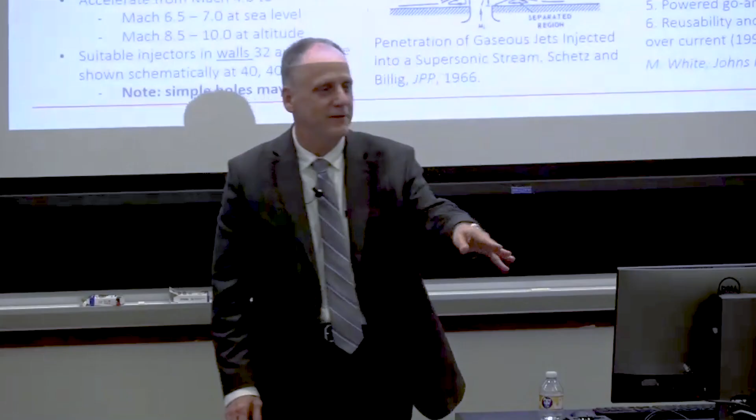But my memory of Fred Billig is from the aerospace sciences meetings that we used to hold in Reno, Nevada all the time. You would see Fred with his yellow notebook, writing notes with his stack of papers, running from one room to the next room, to the next room. He was a lifelong learner, and that was just a great example for all of us.

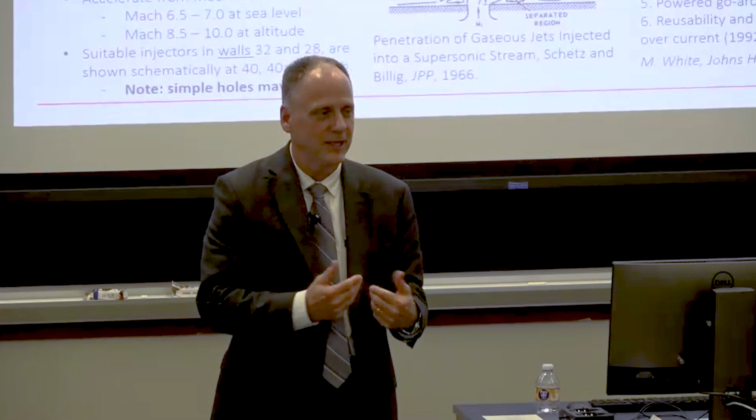But for y'all, the students in here, I don't want to set the bar too high, but Fred had a patent on a supersonic ramjet missile that resulted from his PhD dissertation. So that's no pressure to think about that.

And he worked on lots of things, including jets into a crossflow, which are fuel injector concepts to fuel these machines, because the flow path in here is also supersonic. So it creates a very complex shock-boundary interaction, shock-shock interaction, fuel-air mixing problem. All the gas dynamics that you really could possibly be interested in are happening in this particular problem. So it's a very interesting problem, and I'll show a few results on that.

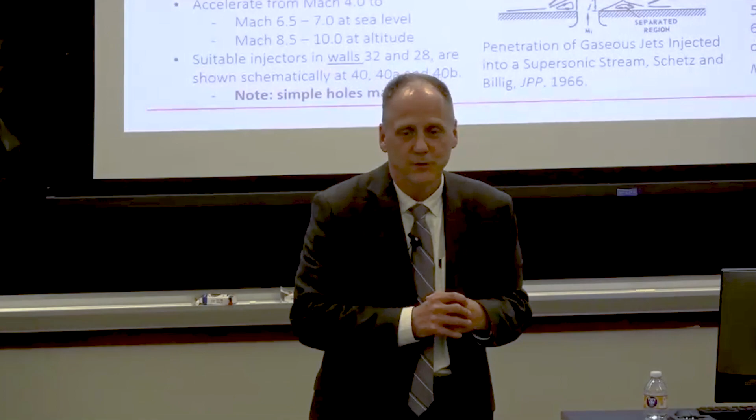And then he also was very instrumental in a program called the X-30, or the National Aerospace Plane Program, which is really what brought me into this field back in the late 80s. This was the Ronald Reagan Orient Express, supposed to be a single stage to orbit, hypersonic, scramjet-powered airplane. So his dissertation work that he started as a student became a major program.

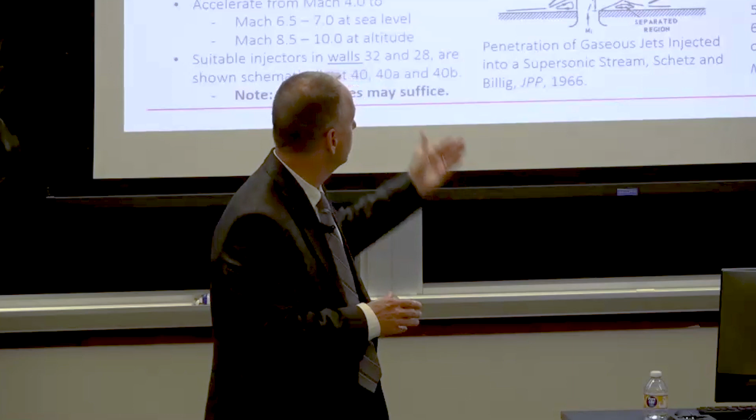There's a lot of people around the country that have PhDs - I'm looking at one right now - that were funded by this program. This was a major program in the country, and Fred Billig is at the top of this. Without Fred Billig, we're not doing these things. And so his impact is amazing. I was lucky I got to know him a little bit.

When I was asked to give the talk, I thought, what am I going to talk about? There are fluid mechanicians at Johns Hopkins who are world renowned, so I'm not going to try to wow them with our ability to do fluid mechanics. So I stepped back and decided to present on topics that I thought Fred might enjoy, or at least find relevant.

I'm going to focus on hypersonic turbulent flows. Sorry, this is my prop, keeping me on track.

I'll provide a little bit of optimism towards building reduced order models for these types of flow fields. There's been a lot of skepticism over the years, but I think we have tools today that will allow us to make progress that we couldn't make 20 years ago. Hopefully this will inspire a few collaborations with faculty and students here.

I have to acknowledge the sponsors for this work: AFOSR, ONR, this is a collage from these folks. But most importantly, I want to acknowledge the collaborators and students. Everything you see has a student's fingerprint on it, including our laboratory, which I'll talk about later. They're all brilliant, and they're just instrumental in our success.

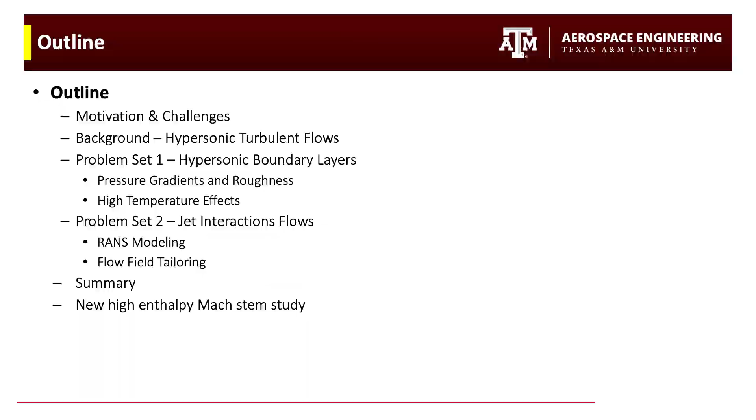The outline for the talk is motivation and challenges, but I won't spend a lot of time on background because I want to get to some of the cool results. I went a little heavy on results, so I designed the presentation so that if I'm running out of time, I can skip sections. If you see me skip through a few sections, that's just because I'm running out of time, but I designed it that way.

I want to talk about two different problem sets. Problem set one is hypersonic turbulent boundary layers, which is more of an external aerodynamics type problem. Problem set two will be supersonic jet interaction flows. The common theme between the two is they're both turbulent, they both require either large scale simulations or models, and they also require experimental data to validate. Then we'll summarize and talk about some ongoing work.

Just a little bit of motivation: hypersonics is not new, it's been around for a while. I like this picture because I work at Texas A&M. The guy on the bottom left, if you know anything about Texas A&M, you'd recognize those boots. That's Frank Molina, and these are Aggie boots. He was an Aggie, graduated from the mechanical engineering department, went to Caltech, became Von Karman's right-hand man, and flew the first hypersonic flight.

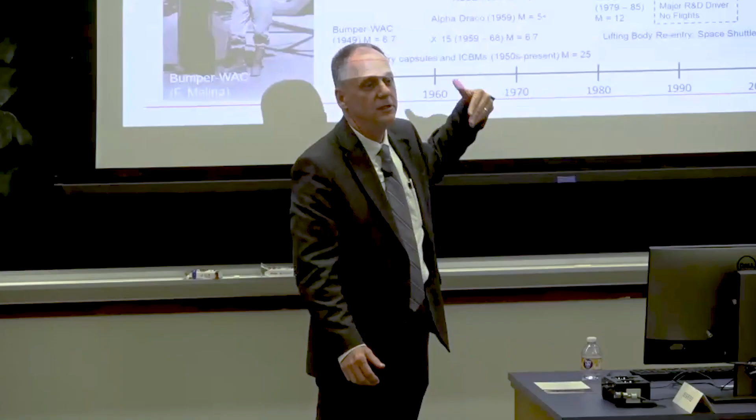There's been a lot of really fantastic work over the years to develop hypersonic flight systems, from reentry capsules to the space shuttle to all these different flight test programs. I used to have a picture of the X Prime that looks like the dream chaser shape, a beautiful vehicle. So all the things we're doing now in hypersonics, someone has probably done before. It's pretty exciting. So what makes hypersonics hard?

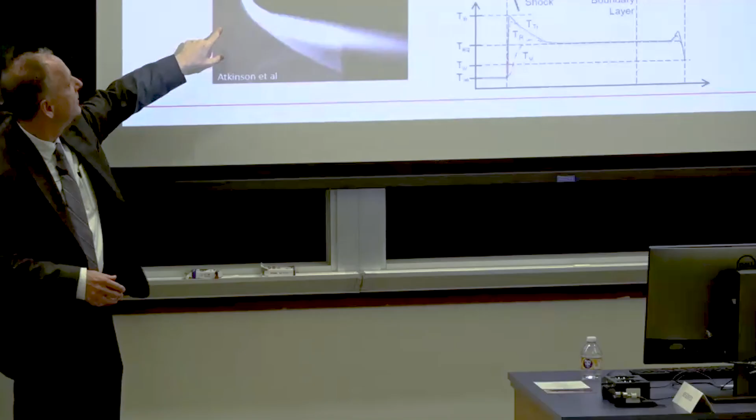Maybe what makes hypersonics hard, which also it's the same thing. This blue text on the right really does sort of summarize it. But let me tell you what this is. This, and Dave has seen this facility in action. We have a wind tunnel, which I'll show you in a few minutes. We call HXT, the hypervelocity expansion tunnel.

And we can generate true flight conditions up to about Mach 15. We're going to push that to Mach 20, 25. This is a Mach 15 shot. And you can see this is the natural emission downstream of the shockwave. And so this model is about 20 inches wide, about 24 inches. It's a big model. It's in a big wind tunnel. And this is just a video showing this, a lot of electrons in there.

But this was taken as part of an Aeronautics project that we're doing for Lockheed Martin. But that's just really cool, right? And if you look at the entire model, that plasma goes off the back. You can see the plasma going off the back of the model. So the turbulent boundary layer that we're studying also has these physics dumped on top of it. So this is a really complicated problem.

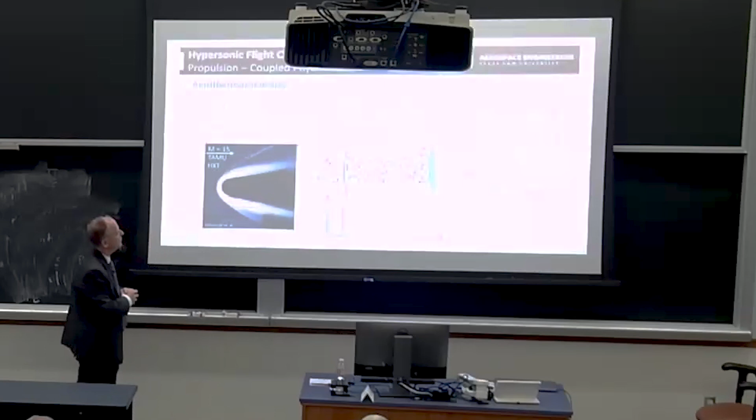And I tried to articulate it a little bit here, but when we jump across this shock, for that particular case, it's about 11,000 Kelvin right there. And then it starts to rotationally excite very quickly and vibrationally excite very slowly. Chemical equilibrium, all this stuff happens, and we're about 6,000 Kelvin. Then you're moving into the boundary layer.

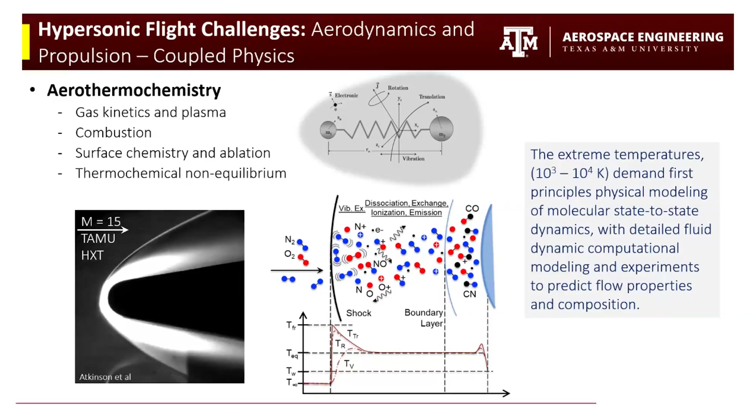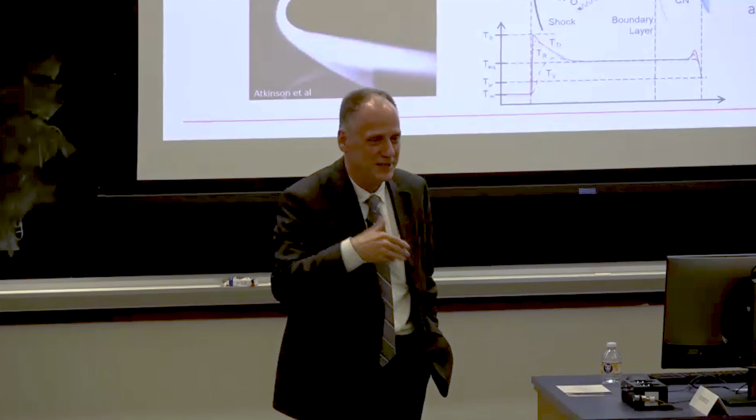So a quote from Fred Billig, when he was at Wright-Patterson, the Air Force was thinking about a certain Mach number regime, and I won't quote the numbers, but he asked me if I knew the difference between this Mach number and that Mach number. It was about 2. So I said it was about 2. He says, no. Every metal on the planet melts at this higher Mach number. So that was a direct quote. That was sort of who Fred Billig was as a person when it comes to these things. So there's a lot of interesting physics going on in these problems, and we're excited about all of them.

Now I'll talk a little bit about viscous flows, because we're going to couple that chemistry with viscous flows. So transition and turbulence are the two big problems when it comes to high-speed viscous flows, and hypersonic vehicles are dominated by viscous effects. So what I'm showing here is a transition mode that only really exists for hypersonic speeds, which is second mode transition, and you can sort of vaguely see it. See this rope-like structure? That's a trapped acoustic wave in the boundary layer that will amplify and ultimately break down and lead to turbulence. I think I saw some simulations of this today.

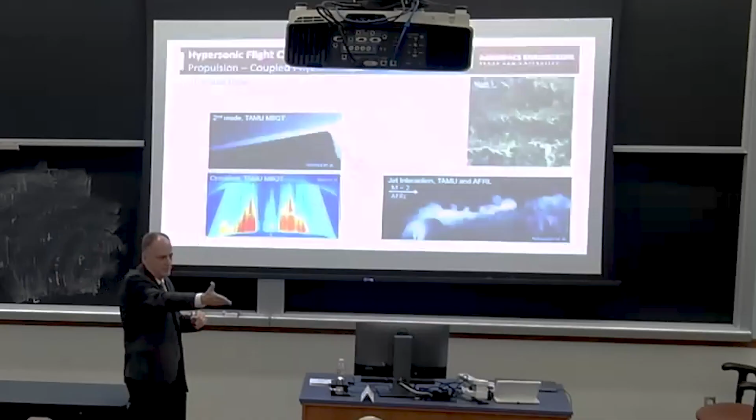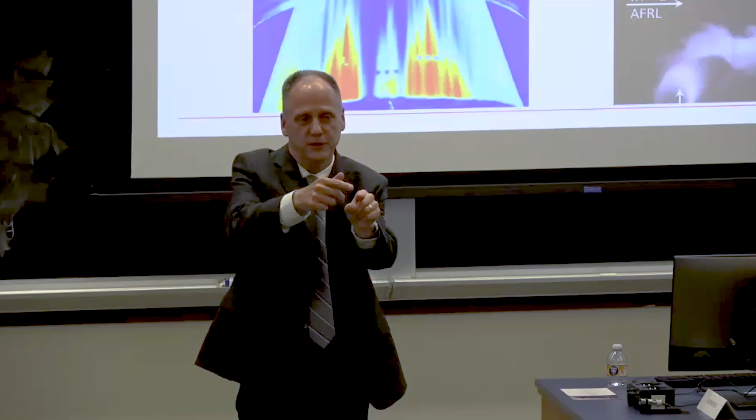And this is what it looks like in the wind tunnel. This is a Mach 6 quiet tunnel that we operate at A&M. This one is a 2-to-1 elliptic cone. Okay, that was a HIFiRE flight test. And then this structure here is the characteristic structure for what's called cross flow breakdown. So what happens is you have the flow wrapping around the model. So in the boundary layer, you get an inflection point, and that creates these vortices that go down the boundary layer. And these themselves then generate shear layers, and those shear layers are what leads to transition. So this is a precursor to transition. This is actually starting to transition on this model.

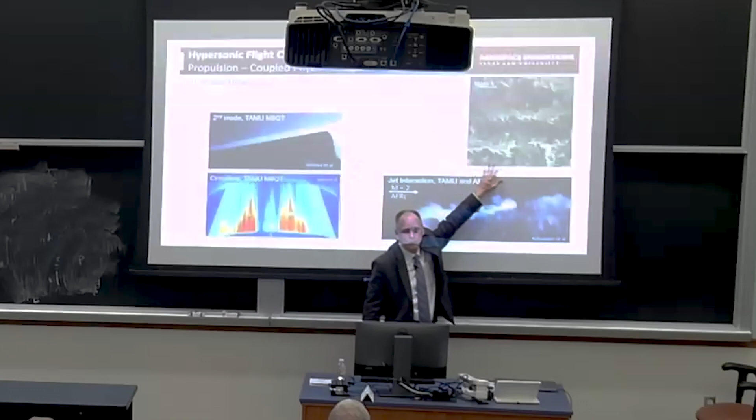But when it goes turbulent, this is a top-down view. I don't know how well that's on the screen. It's magnificent. Up there, not so great. You can see a turbulent boundary layer. If you zoom in, you can see all kinds of scales in here. So this is a high Reynolds number Mach 5 turbulent boundary layer. And so once it goes through this process and breaks down to turbulence, it kind of looks like this. And then to solve this problem requires, again, resolving all of those scales, which is a really hard problem.

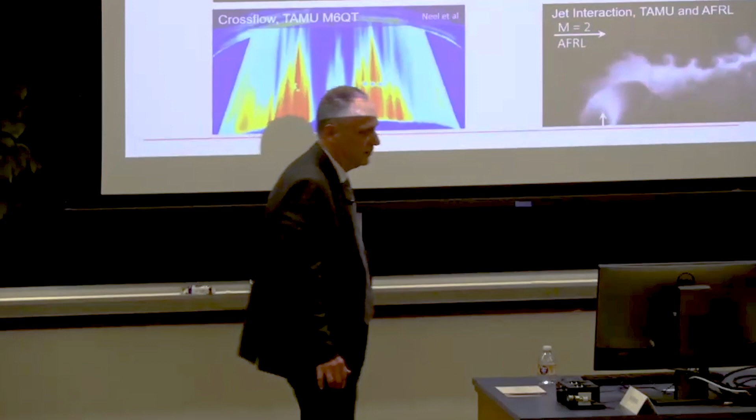And this is a jet interaction. This is for Fred. It shows the turbulent mixing in a supersonic cross flow. This is a fuel injector. This experiment was done in AFRL. We'll talk about different geometries a little bit later on that. So those are the couple of problems that we're really interested in. So I'm going to talk about turbulent boundary layers a little bit more. And really, I just want to brag about this figure.

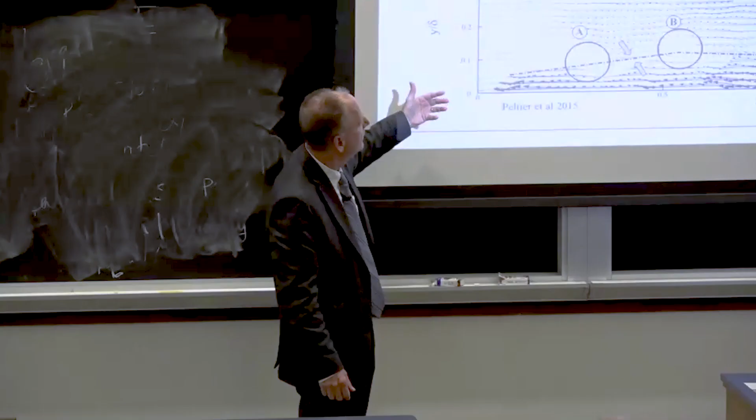So I saw some great PIV capabilities today. This is a PIV image at Mach 5. What this is is a convective velocity plot. So what we've done is subtracted off the convective velocity. And what you're seeing circled here are signatures of these hairpin vortices in there.

In this line here, you've got flow going that direction and flow going this direction. This is the stagnation line along what's called a very large scale structure. This is in a Mach 5 boundary layer. So this is, I think, the first measurement of its type in a hypersonic boundary layer. This was an incredible measurement.

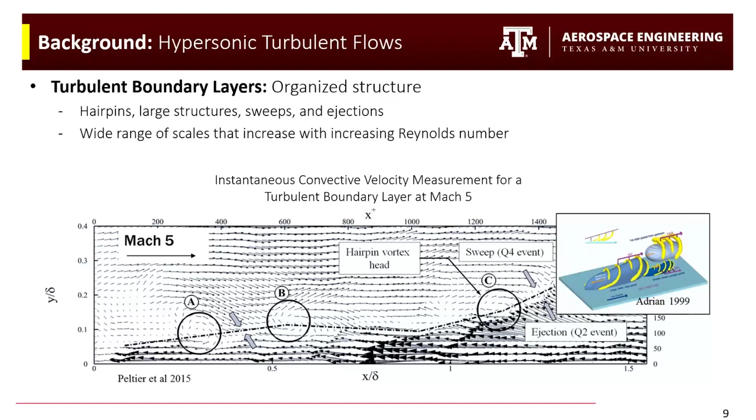It was done by Scott Peltier, a student. He did this a number of years ago. It's just a beautiful image. So I'm bragging about that. I'm sorry. It's relevant; you'll remember this figure because we're going to come back to it.

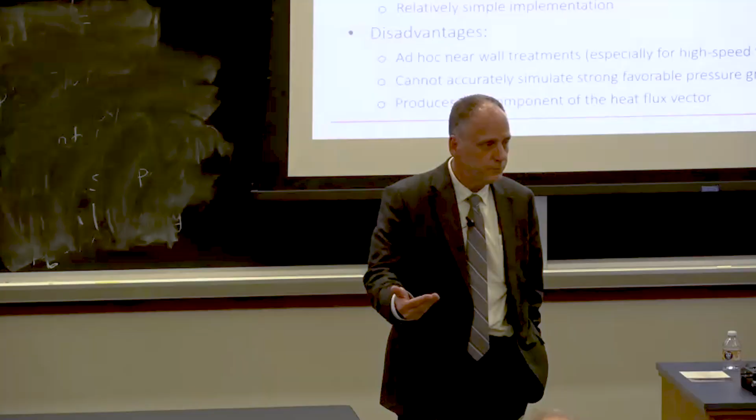Okay. So in terms of modeling of turbulence, resolving all of those scales is computationally very expensive, especially if you turn on chemistry. I'm going to show you the equation set and how the equation set changes in a few minutes, but when you turn on chemistry, the ability to do direct numerical simulations gets really fun, because your equation set gets really big.

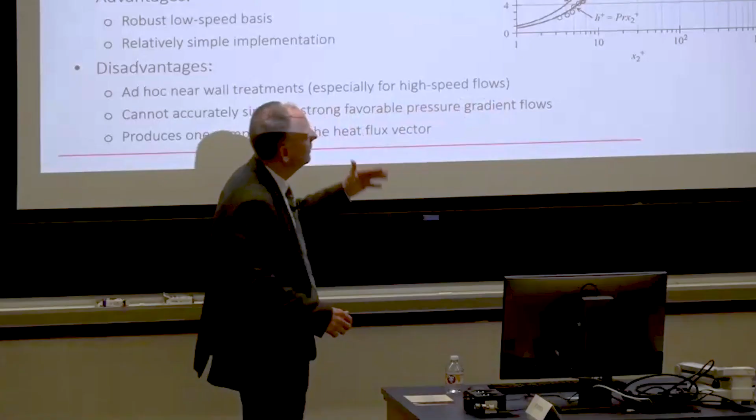And what we're going to find is that may change for hypersonic flows in a way that we don't predict. So the advantages of these models, they're relatively robust at low speed, really simple to implement. Disadvantage, this near wall behavior is treated. I should point out, for those that aren't in our field, this is like the bottom 1% of the boundary layer. This is really, really close to the wall. And that's a log scale. That's really, really close to the wall.

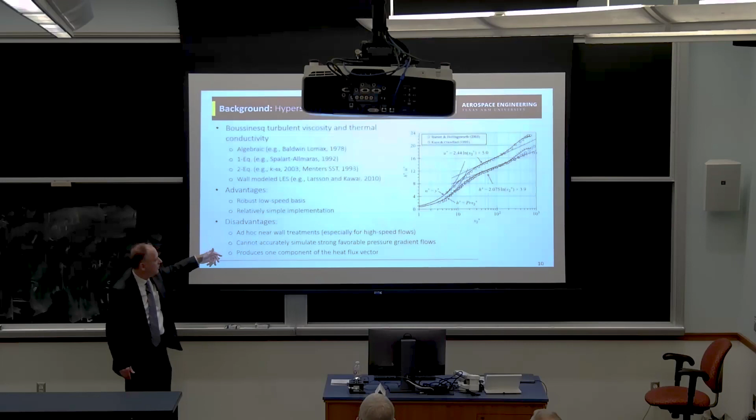So the near wall treatments are ad hoc, especially for high speed flows. And I'll show you that we can't simulate favorable pressure gradients with any of these models. And then for the heat flux behavior, the current treatment that we use really only gets one component of the vector correct. The other two components are more or less incorrect, and that's just accepted. So this is the state of the art. But there are significant errors.

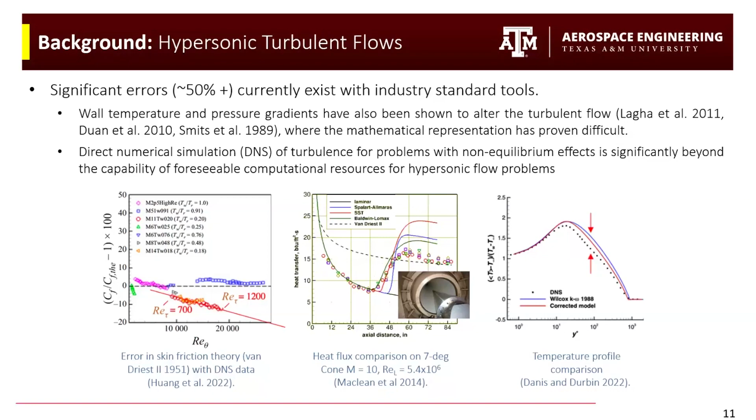If we start to look at very high Reynolds number cold wall problems, which is relevant to hypersonics, and extrapolate this out to a realistic Reynolds number, we're starting to see large errors in the skin friction. You can see large errors in the heat flux. We've got other data that we can't show, but there's very large errors, up to 50% errors in the heat flux for these types of problems. You can see that the temperature profiles are also missed by this. So bottom line with this slide is we've got work to do in order to improve our prediction capability for these types of problems.

All right, so that leads to the research objective.

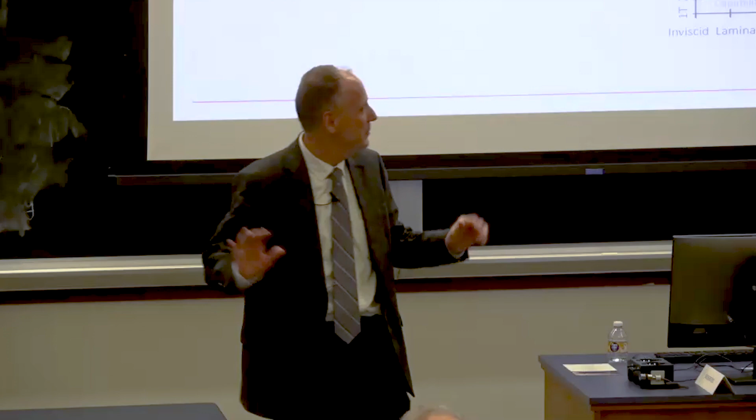Sorry, I pace when I talk, so hopefully that's okay. If it's not, if it's distracting, let me know. And we do love this stuff.

And so our objective really is to advance understanding and mathematical treatments for hypersonic turbulent flow. That's for this one. Tamir, if I would have called you, I would have put the transitional results in because that's what we talked about today. We're going to talk about turbulent flows.

Our approach is really founded in two steps. First goal is to develop new mathematical treatments because the mathematical treatments require new advancements. The second goal is to create databases with numerical and experimental data to validate our ideas or sort out what's wrong with our ideas and fix them. And this figure, I try to summarize it.

So this is fluid dynamic fidelity on the x-axis. So we have inviscid to DNS, and then you can think of this as sort of thermochemical fidelity on this axis. Okay, one temperature model, two temperature, and this will make sense in a few minutes, three temperature. At the top, we treat every internal state of each molecular species as a species, and we resolve it all. So ideally, we would be up in the right corner there for a model-free simulation. We sort of live on this dashed line right here today.

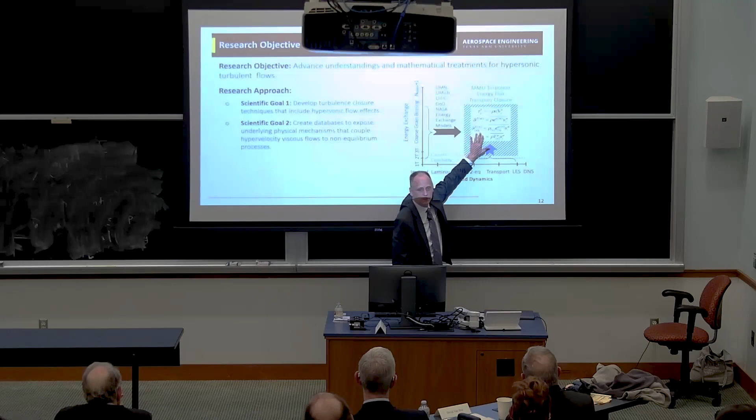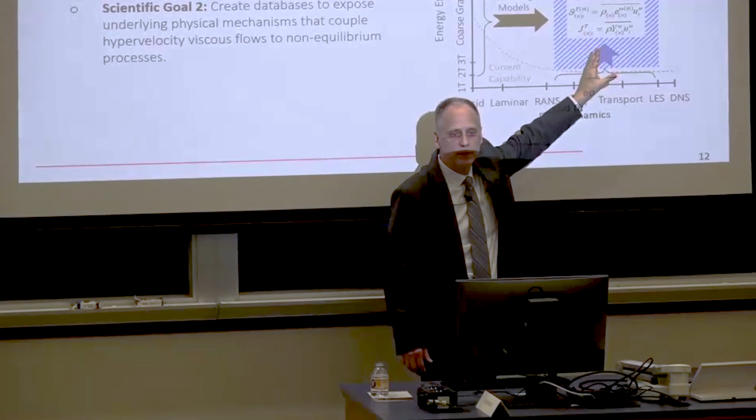And what we're trying to do is to develop models that push us up and into that direction. So that's the big picture of what it is we're trying to do. We work with a lot of people to try to accomplish this. And what's listed in here are the second order turbulence moments; I'll talk about these a little bit later. The experts in the room will recognize all of these, but if you're not an expert, I'll explain what that is in just a few minutes.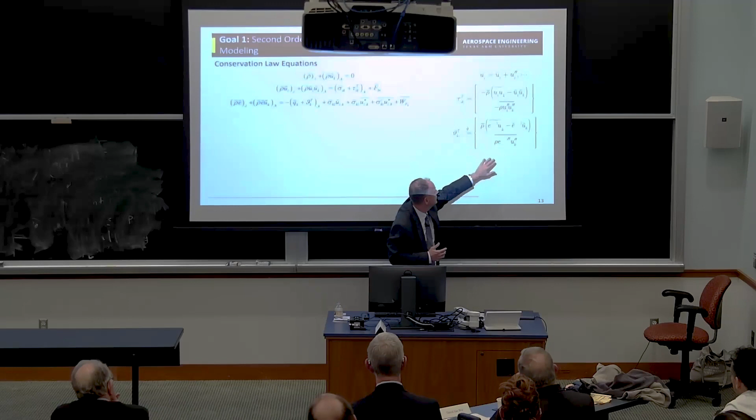The one above is what it looks like if you're doing large eddy simulation. This is what it looks like for Reynolds averaging. This is the energy flux. I work with energy, not enthalpy; there's some theoretical advantages there. But if you go to hypersonic flows, it looks a little different. That was for low speed flows. This is what the equation set looks like for hypersonic flows, so it's a bit more challenging.

So let me just walk through a little bit of this. We're going to introduce now a species conservation law equation, which has your chemical production terms, your molecular diffusion, your turbulent diffusion. Now you split the energy up into translational motion and electrons, which, because the speeds are so different, have a separate electron equation. You have internal modes, so you have an energy pool for each of the internal modes. If you're running a CFD solver today that's doing high temperature, non-equilibrium gas dynamics, you're solving an equation set that looks like this, probably a finite volume version.

And so we have all of these new unknowns to deal with here. What we like to do is derive equations for our new unknowns. So we take unknowns of the previous set of equations and we derive transport equations for all of those new unknowns. And if you're thinking, okay, problem is solved, I now have equations for all the new unknowns, Tamir's laughing because we can't solve these equations. We can only model them. Because every time we do this, we introduce new unknowns, because they're still nonlinear. So it never stops. So we have to model equations.

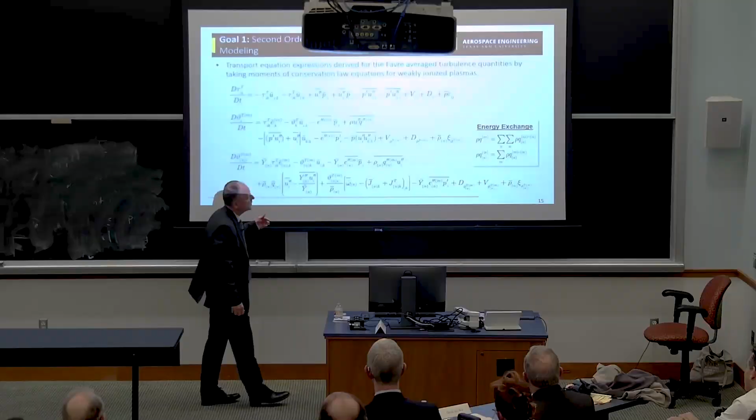So I tell people that's my lot in life: to take very complicated things and try to whittle them down to very simple things that we can put our heads around and make progress with. So that's what we're going to talk about as we go through this talk. But this is the equation set. What's really interesting, let me talk a little bit about this energy exchange here. So when we add up all of these energy equations, wrong equation set.

When we add up all of these energy equations, they have to add up to the overall energy equation. And so we have energy exchange terms, which are up on this slide. These energy exchange terms allow us to account for energy. If you have a collision and you excite vibration in this molecule and you lose vibration in this molecule, you have to account for that in your energy exchange. So those terms over there are how we account for that energy exchange.

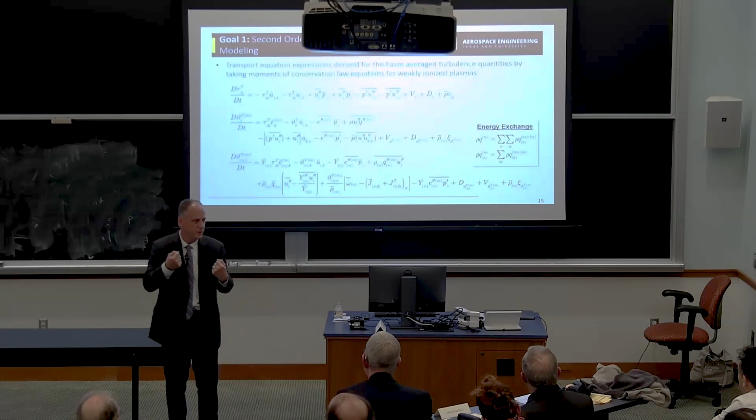So you have to do that species by species. We don't do it collision by collision. We're not that good, but we do it species by species for each. And so you have external, M is internal mode, N is species, M is in, you got it. So bottom line, it's complicated. So that's the mathematical foundation.

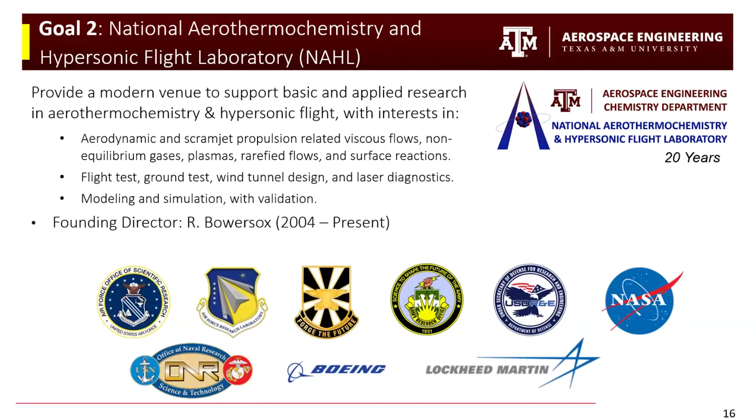So now I'm going to talk about the laboratory. We're going to go back to the mathematics in a minute, but I'm going to talk about the laboratory next. So with all of that in mind, we developed a laboratory 20 years ago. It's a pretty pretentious title, National Aerothermochemistry and Hypersonic Flight Laboratory. My program officer insisted on the name National at the time, and he was paying the bills. We put National in the title. It's really that simple.

And it stuck. And what you're going to see as we go through this, I don't have a whole lot of slides on this, but everything we've built in the laboratory, the thing I'm most proud about, they literally gave us, and David's been there, a metal building in a ditch by the airport. They didn't even have air conditioning when we first moved in. So we turned it into a laboratory. Everything you see the students built, wind tunnels, laser diagnostics, we put them all in. So the student fingerprints are on every bit of this. And really, it's one of the things that make me proud about this laboratory.

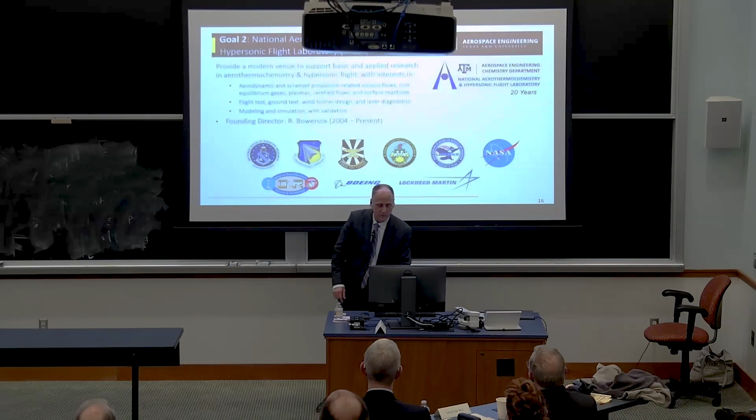But we really wanted to create a state-of-the-art venue to support basic and applied research in hypersonics. One of the corrections on my computer, I listed all the other participants in my laboratory. There's about 15 other faculty members that use this laboratory now, and they're listed on the one that's on my computer. So let me just list the wind tunnels. We've got 3 of them in the laboratory. We're designing some new ones as we speak.

This is the hypervelocity expansion tunnel, the one that's listed top. This was designed and constructed by us in our laboratory. You can see the operating envelope there is the big outside box. This is very relevant to the conversation before lunch today, that operating envelope. This was funded by ONR. This is Tyler Dean, who was the student principally responsible for making this thing operational. It works. We run it every day. We've run it about 500 times so far.

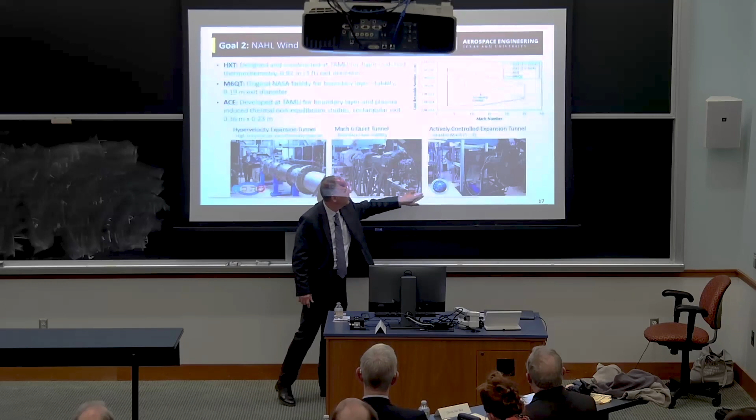Sitting next to it, this is the Mach 6 quiet tunnel. This is the only one we didn't design and build. It came to us from NASA Langley. It's one of 2 Mach 6 quiet tunnels in the United States. This is what we call the actively controlled expansion tunnel. We did build this one. This is a variable Mach 5 to 8 facility. These 2 facilities share the same infrastructure, and we've run them over 6,000 times since they've been put in place.

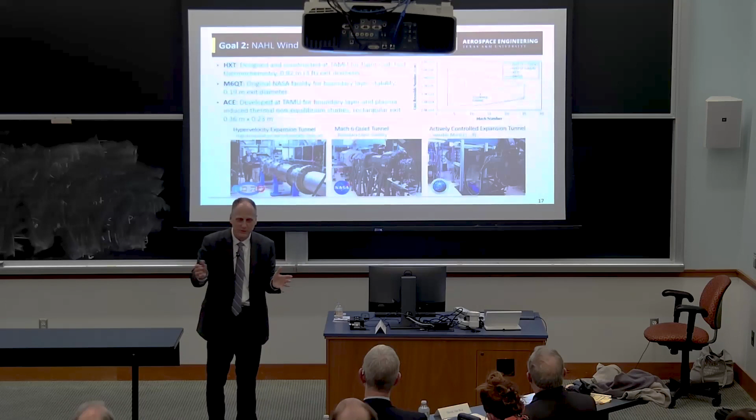The stream tube goes around the world almost 4 times. In our data acquisition, we increment that and we track that. So the stream tube generated goes around the world. So we've flown around the world 4 times at Mach 6 in those facilities.

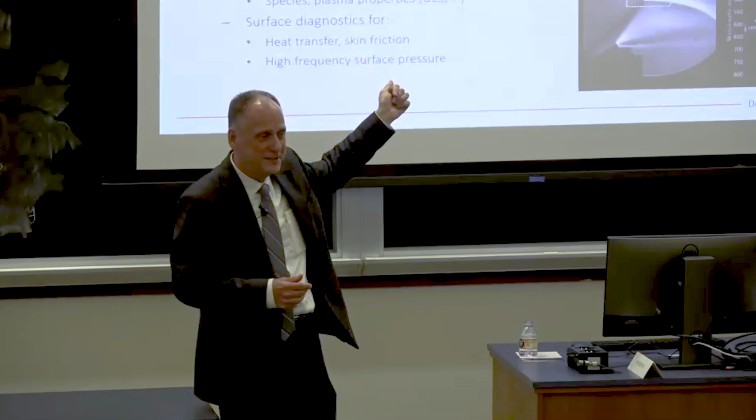Diagnostics. One of the things I did when I was department head was twist Dick Miles's arm to leave Princeton and come to Texas A&M. He created a laboratory called the Alamo. You can send him a note about the spelling. I explained to him that was an Aggie joke, but he didn't care. But Dick is quite amazing, and he's developed dozens of unique laser diagnostic techniques specifically tailored for hypersonic flows.

So his laboratory butts up next to my laboratory. We share doors and we run lasers back and forth. 1 in 4 experiments these days is a Dick Miles laser diagnostic test that we do. And this is a beautiful flow field that I'll talk about at the end. This is a shock-shock interaction. This is 2 wedges generating oblique shocks, generating a Mach stem.

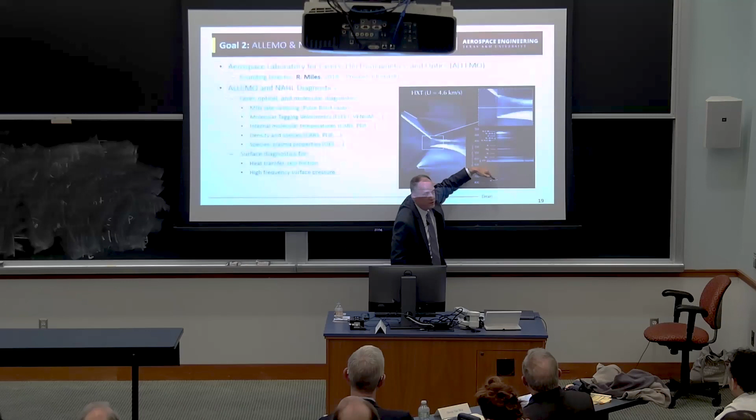And here we still have that same, this is a Mach 15 shot, that same 12,000, 10,000 degree temperature down there. This is the emission spectra that we measured. We did rotation to fully resolve emission spectra along that line. And you can see all of the different species that are lighting up in that particular flow field. So we have fun in the lab.

So the question that we're going to talk about first is, how do hypersonic flow physics alter second order turbulent transport modeling? I tried to draw a cartoon sketch of the physics. I lifted this figure from this paper, Aguilar. It's a great figure showing the underlying structure in the turbulent boundary layer. These black images are what you'd have in a low speed flow, velocity fluctuations, pressure fluctuations, and a high speed flow is a little bit more. We talked about that mathematically.

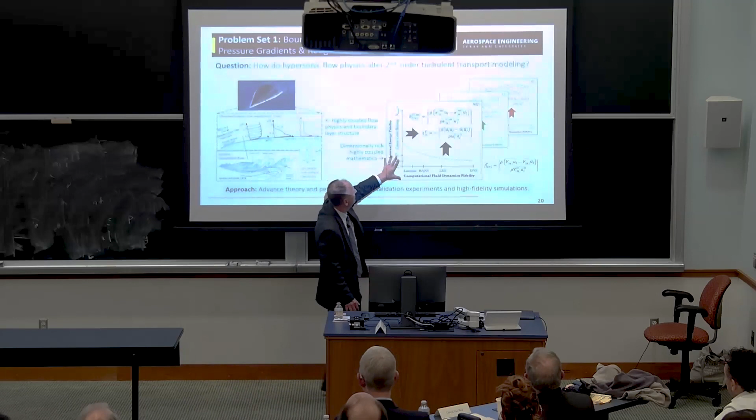So this is highly coupled physics. I mean, you can have surface chemistry. There's a lot of things going on. And that same figure that we talked about earlier applies to every species. And then they talk to each other as well. So this really is a complex problem. So let's look at an example.

This is the first theory. So this is theory number 1. I'm going to talk about 2 theories. We'll go through a bunch of examples. So theory number 1, we're going to look at the approximate solutions to the Reynolds stress transport equation. And this one will kind of make your head spin a little bit.

That very complicated equation. For this particular problem, we designed experiments that really only introduce 1 extra strain rate. So we have your main strain rate across the boundary layer, then dV/dy, so you have a linear dV/dy. So it's a 2 strain rate problem. So we did experiments. We measured the boundary layer properties of shear stresses on that curved wall. Upstream of the curved wall with the pressure gradient is 0, you get a Reynolds shear stress that looks like this. Downstream of the curved wall, you get a shear stress that actually changes sign.

Velocity profile doesn't change sign. Momentum transfer doesn't change sign, but the Reynolds shear stress changes sign. And for the longest time, I was perplexed by this because none of our models would produce it. So I went to the Launder-Reece-Rodi version of the Reynolds stress transport equation model. So can we explain this with that model? Because it's a tensor. We're talking about one component, so it's really hard to understand that.

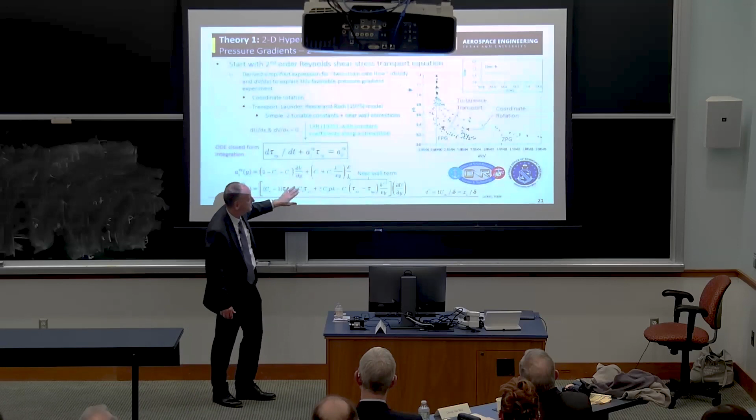Again, we're trying to explain this, and there's two things to keep in mind. As we go, we're in a wall normal coordinate system. Going from the upstream coordinate system to the downstream coordinate system changed the answer to here. The rest there is transport physics. We have to deal with the transport physics there.

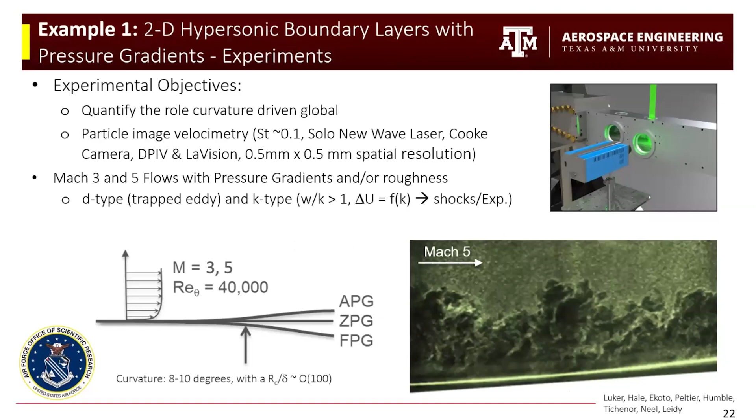So we did more experiments with adverse and favorable pressure gradients. Made sure the upstream looked good. I probably went too fast on that, it doesn't show up so great here, but you can see all that structure in the boundary layer. It's just beautiful, right? Anyway, let's go back to this. So we made measurements upstream, make sure we're getting the right answers. Mach 3, Mach 5, did more than one Mach number.

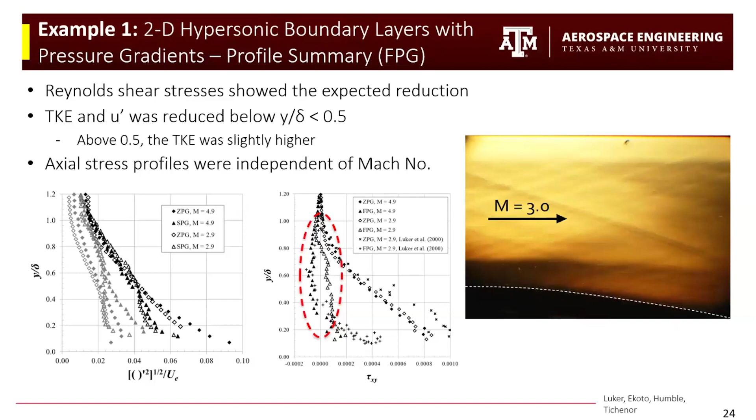This is the law of the wall velocity profile. This is the axial turbulence intensity, transverse turbulence intensity, Reynolds shear stresses, upstream Reynolds shear, different measurements. It's all normalized. So, all right. Again, negative values. This is one of our Mach 3. You can see the expansions coming off of there. That's not much curvature. I'm pretty sure most of our vehicles that we fly will have at least that much curvature. Okay, so none of our turbulence models can get that right.

This is the DNS of that same problem, just to show that we're not providing bad data. Wu at Ohio State did a DNS. Symbols are our experiments, the lines are his DNS. That's the Reynolds shear stress, the negative Reynolds shear stress. You can see all of the axial things, inverse velocities. So we did a good experiment, and they did a good calculation.

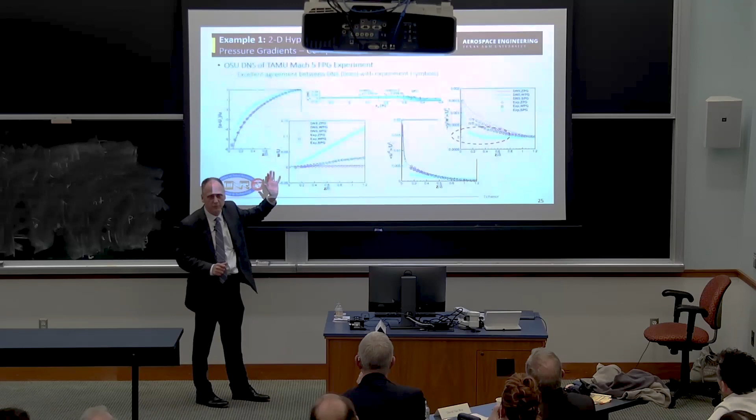Let's explain what's going on. This shows the zero pressure gradient prediction out of the Launder-Reece-Rodi model. Predictions in quotes, because we took the experimental data and ran it through the model, so it's not really a prediction, it's actually an evaluation with the experimental data. It goes right through the data with the original Launder-Reece-Rodi constants. Adverse pressure gradient does pretty well. Without doing anything, the Launder-Reece-Rodi gets this outer part.

So the Launder-Reece-Rodi has the physics to get the outer part right, but it misses the near wall. What we found out in the near wall was that the favorable pressure gradient is altering the shape of that stagnation line, or that very large scale structure that we talked about earlier on. This is a convective velocity profile that is conditionally averaged on a vortex - that's just the average. Same thing there - you can see this truncated, very large structure. That shows up in the spectra.

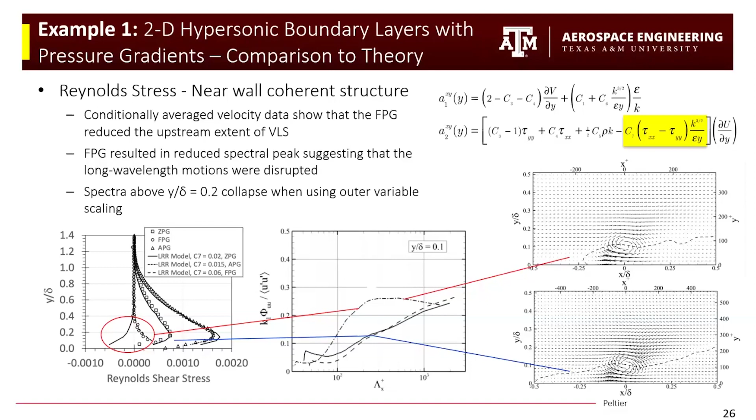For the zero pressure gradient, the peak is over here off the curve. Favorable pressure gradient, the peak is over here. So we've fundamentally changed the underlying structure of this turbulent boundary layer. That shows up in that term that's highlighted. We can adjust C7 and sort out what's going on there from a modeling perspective. But again, it's a little bit of curve fitting - but really this is the physics that are going on.

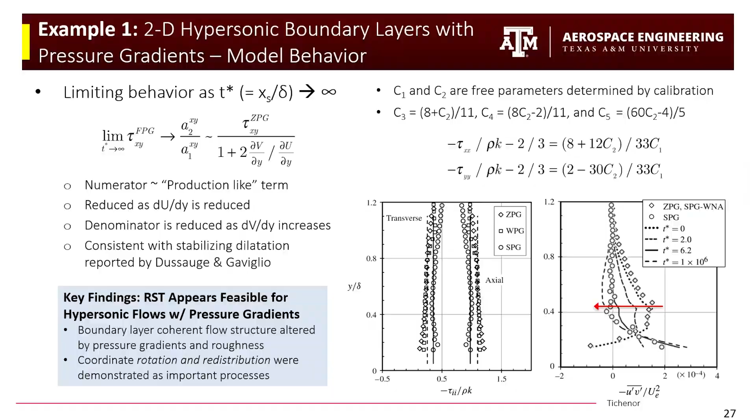So that was interesting. So what the bottom line there - there's a lot more on this slide - is that Reynolds stress transport appears to be able to handle hypersonic flows with pressure gradients, adverse and favorable. But you have to take into account rotation and redistribution when you develop the models.

That's the take home out of all of them. So that's one blue box. And throughout the talk, I have a bunch of blue boxes. These are building a story as we go through - blue boxes are the story.

And this is just, again, showing - this is after you rotate it. This is the physics part. I want to make sure I'm going to get through this.

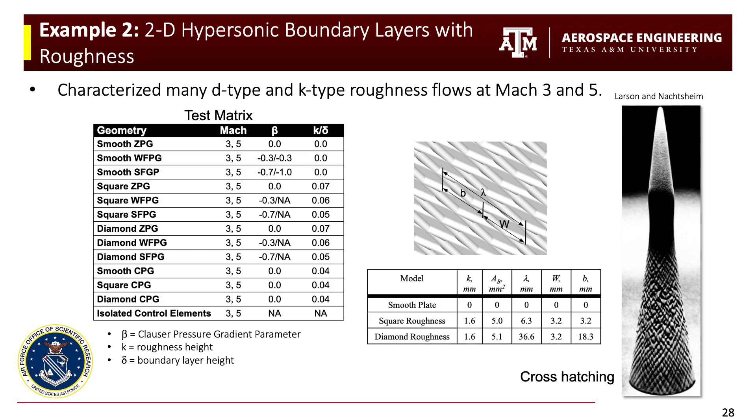It also works for roughness. Roughness is interesting in hypersonic flows. This is a cross-hatching pattern - this happens naturally on hypersonic vehicles. When they melt, they create a cross-hatching pattern. When that happens, you get a wave structure that reaches out all the way across the boundary layer. So now you have a sinusoidal pressure gradient.

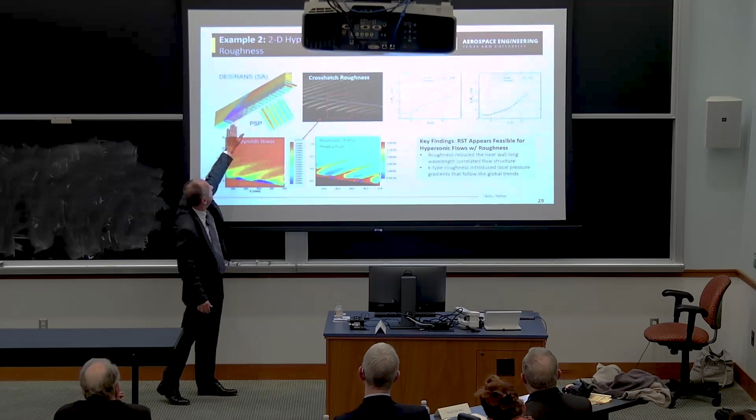These are PIV measurements - these are measurements, not calculations. This is Reynolds stress production across this boundary layer. So these are really interesting measurements. And you can see the pressure sensitive paint measurements also on the surface, compared to a DES, detached eddy simulation of that problem. So it works.

Theory number two, a bit faster. We're going to look at the energy - now we're going to look at high temperature effects. We derive a reduced order form of the energy flux equation. I'm going to skip some steps - this won't be on the quiz.

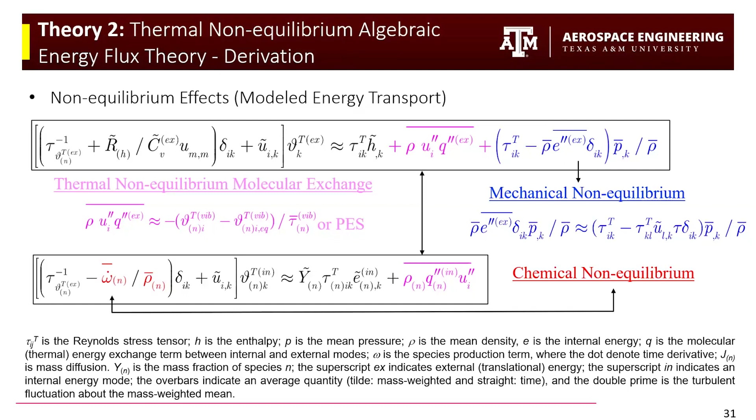At the end of the day, we've taken that energy flux equation and written it as an AX equals B, so it's an algebraic form. We reduced it down - AX equals B - and we can see where the physics come in. This is that mechanical stuff that we just talked about. The pink terms are the thermal non-equilibrium terms, plasma-like terms - I'll show you some of that. And then the red terms are the chemical reaction terms that show up. So this gives us a closed form model for the energy flux across the turbulent boundary layer.

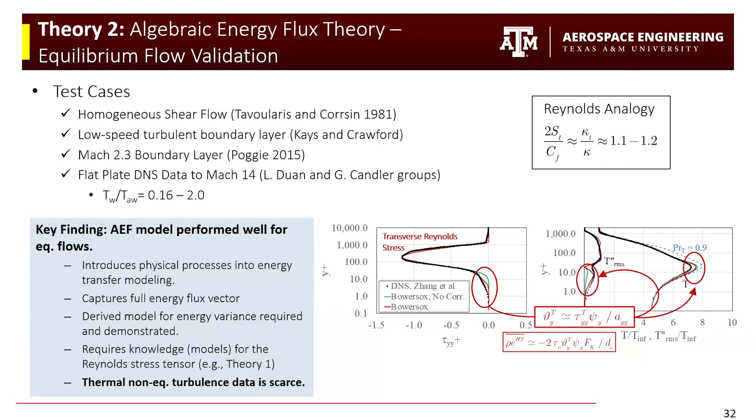Bottom line here is it works really well for low speed flows, and for flat plates, we've tested it up to Mach 14. DNS data captures it. The better we do at modeling the Reynolds stresses, the better this model does, because it depends on the Reynolds stresses. So this too works. Okay.

And this is a DNS that we just recently did.

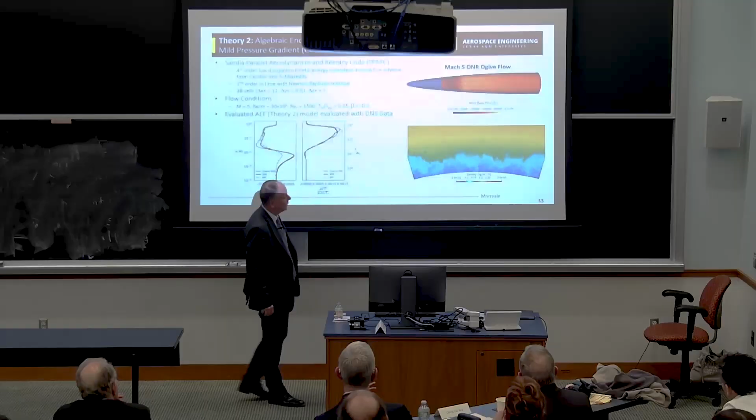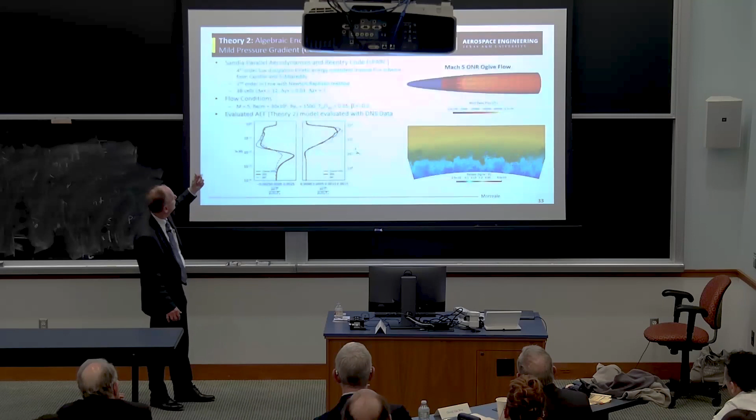Good. So this is a DNS that we ran on this ONR project specifically to probe turbulence statistics. We're probing that DNS. This was run on Lawrence Livermore machines using the Sandia SPARC code. I have a reference, but it's not up there.

We also did some plasma experiments, related to some of the work you're doing. This is a channel flow, so this is what you're interested in. This is a low Reynolds number turbulent channel flow that wants to relaminarize.

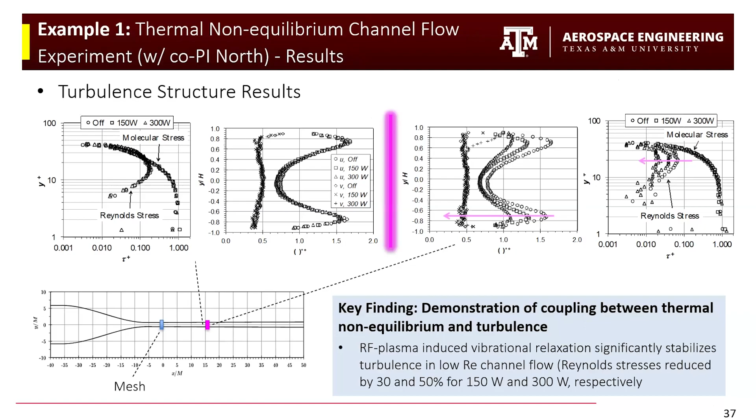What we're doing, skipping some steps here, is showing that when we turn on the plasma, we can alter the turbulence in this problem. This is the turbulence intensity, this is the axial component. The transverse component doesn't change, but the axial component does, and the Reynolds shear stress does. So thermal non-equilibrium does couple to turbulence. That's the important take home here, that we can couple thermal non-equilibrium to turbulence.

We also did this at Mach 6. And again, you're smiling because this is exactly what you're doing. That's why I was talking. We have tripped flow, electrodes generating a plasma, generating a turbulent boundary layer that's coupled to plasma.

So let me get to the cool stuff. Although, take a second, you can absorb that figure. That's beautiful for us experimentalists. That is a beautiful figure. So take a minute.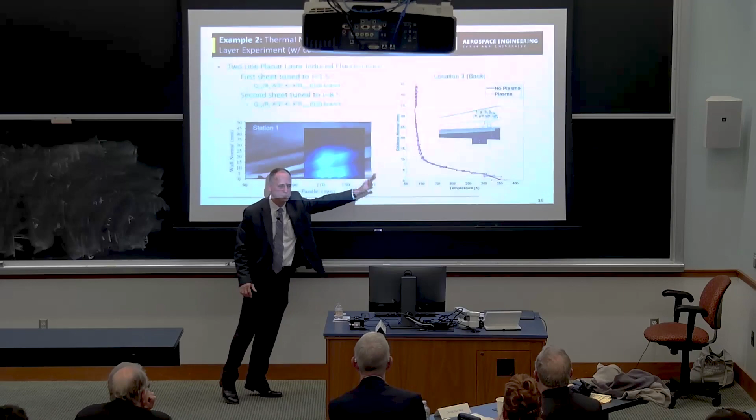This shows the rotational temperature. We're even picking up the shock wave across the boundary layer. Remember that second mode we talked about? These trips trigger second mode. This thing breaks down, goes turbulent. It's a beautiful experiment. This shows the boundary layer evolving. You can see that second mode light up there, working its way down. It's turbulent, very turbulent. This is where we're making our measurements at the back station.

These are surface pressure fluctuations in the boundary layer. So this is a great experiment. I think you're going to find it useful.

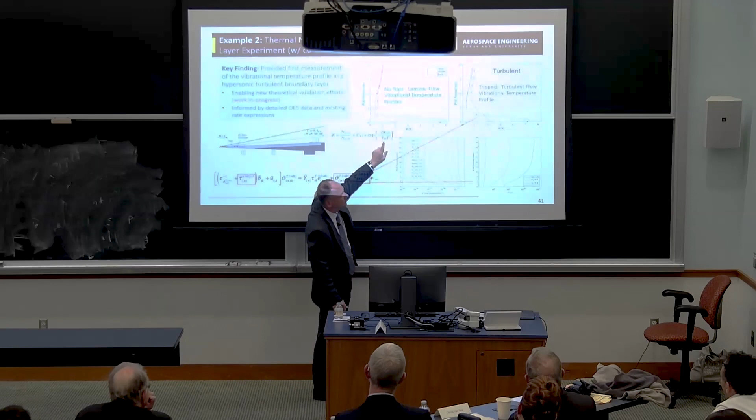So what we did, again, this is that reduced energy flux equation for the vibrational mode. And we produced, for the first time that I know of, a profile of the vibrational temperature across a hypersonic turbulent boundary layer. So now I have data to see if our modeling makes any sense whatsoever. We didn't have that before we did this experiment, so that was really key.

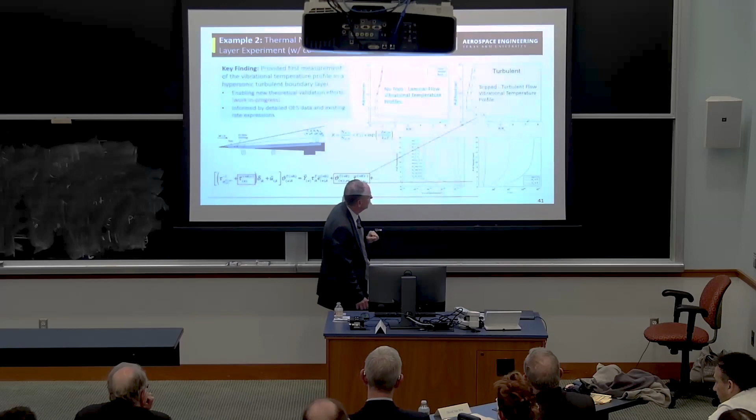And what we're doing, this is still a work in progress. Now what we're doing is, if you look at this, we've taken an emission spectra—there's a lot going on here. We have to go and sort out which reactions, which molecules are vibrationally excited, which equilibrium and non-equilibrium processes are going on from a chemical perspective, so that we can sort out what the vibrational relaxation time constant is. Once we have the time constant, this is closed, and we can see if this model works or not.

So we're right there, we're doing that work as we speak. Really cool stuff. All right, let's get to—I know we have 10 minutes, but I'm going to go over, sorry guys. This is really cool stuff to me.

So the second one I want to talk about, this will go quickly, is the fuel injector work. This is for Fred, he studied these problems. When you inject fuel into these scramjets, you get a shock wave surrounding it, separates the boundary layer, get a lambda shock, get rotating vortices. It's a very complex three-dimensional problem. So the question is, can we model this with the second order transport model?

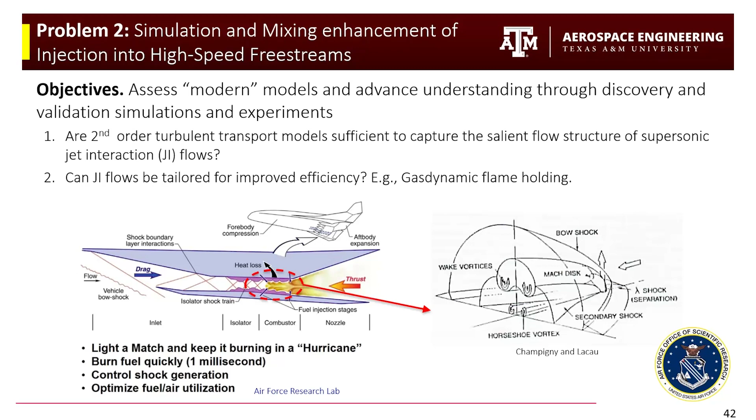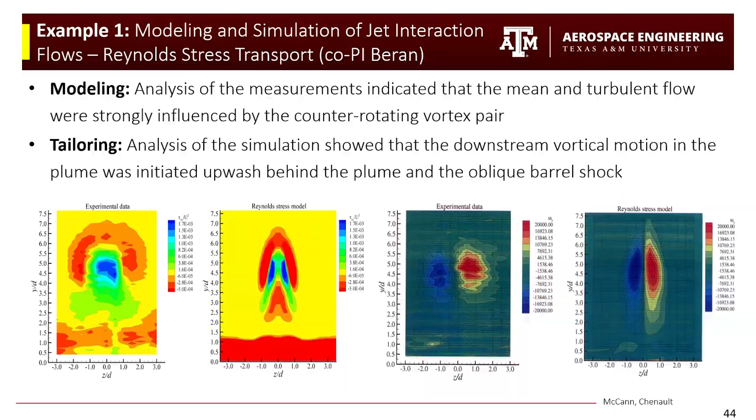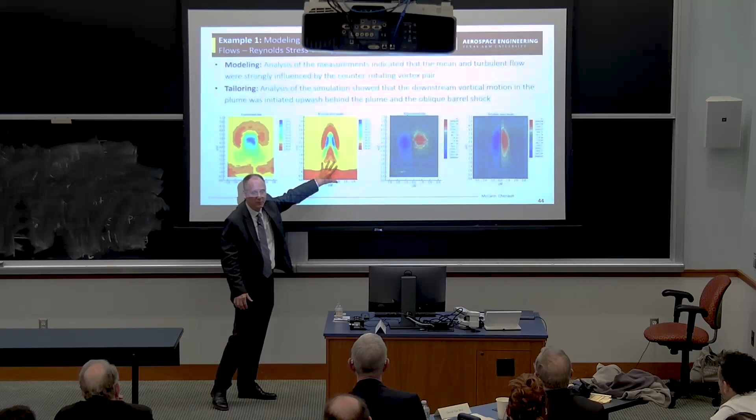They're on the same scale, structures are about the same. That's not bad, actually. Vorticity, those two large scale vortices—there they are experimentally, again on the same scale. So that's actually a pretty good fit, considering all of the assumptions and approximations that have to go into this model. We were surprised by how good that actually worked. We also did detached eddy simulations.

Those worked even better. We can get an idea of the complexity of this flow field. But what we really wanted to do—I want to jump to this one anyway—this is close to my get-off-the-stage slide. I'm almost there, guys. We wanted to see, can we tailor...

...the flow field for these fuel injectors? Because you pay a price. When you inject this fuel into the scramjet, you generate a shock wave. What is a shock wave? It's drag, it's thermal losses. The question is, can we tailor the shocks to do other things besides just provide drag?

And so we started tailoring the shape of the injector. What we were able to do is trap a coherent vortex right here, so that it could serve as a flame holder, as opposed to what we do now, which is a big hole in the wall for a flame holder.

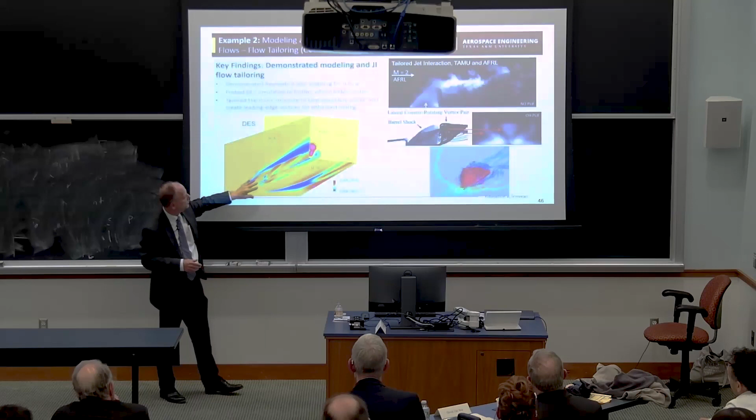So it worked. And we can also probe these DES simulations for the Reynolds shear stresses, the things that we really can't measure, to help tune those models we're talking about. So this pays double dividends for us.

But this is really interesting. I think Fred would have found this really interesting, because he was interested in jets into a cross flow and penetration, mixing, and all of that. So this was designed to enhance mixing, minimize losses, and trap a vortex, and it did all of them.

Next steps, really high enthalpy stuff. We're studying this shear layer. For the interest of time, I'll just go through this really quickly.

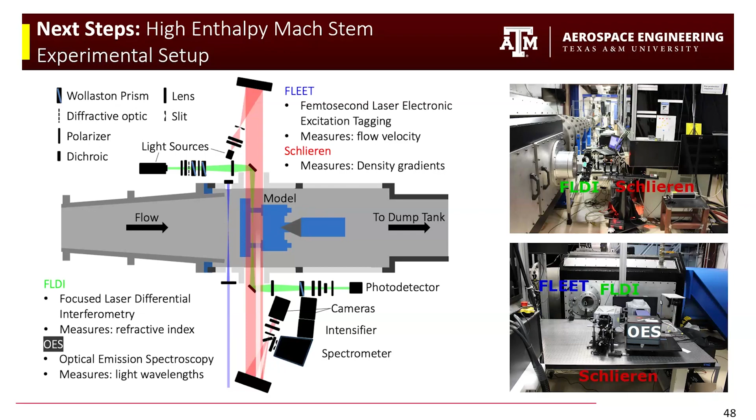This is that shock-shock interaction that I showed you earlier. This is the wedge, 40 centimeters deep, huge tall Mach stem. These are all the measurements we try to do simultaneously. Each shot costs us about $1,700, so we try to get as many things on there as we possibly can for every shot. So you can see all of it.

This is a very complicated setup in our lab, and this was Tyler Dean who did all of this. This just shows some results.

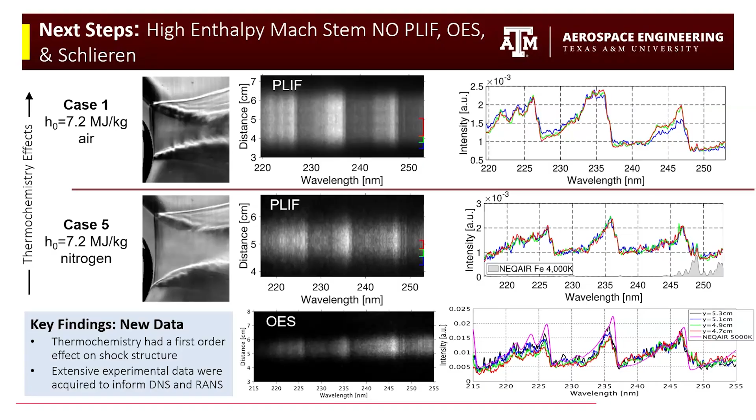This shows some planar laser induced fluorescence and some optical emission spectroscopy measurements coming out of there. And you can see that we're capturing what we think we should be capturing. We're capturing equilibrium temperatures around 5,000 Kelvin, which is about the right answer.

So we're studying, but what we really want to study is this turbulent shear layer. And we want to study that turbulent shear layer.

That takes me to the summary, and this is it. So our next DNS calculation is going to be that shear layer. See that yellow box? What's cool about this is there's no walls in there, so there are no wall effects to deal with.

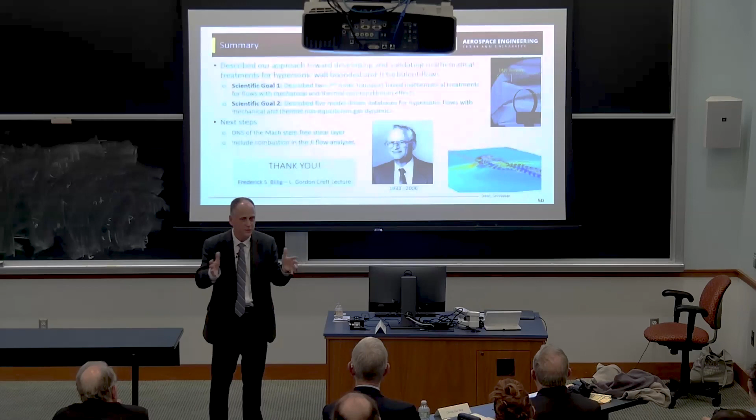And our boundary conditions are just the shock jump conditions. Just apply the shock jump conditions, generate the shear layer, and it drops there. So that's a simple DNS from a grid perspective, and it is almost a Cartesian mesh. Very simple. That allows us to then exercise different chemistry because we have simple physical DNS.

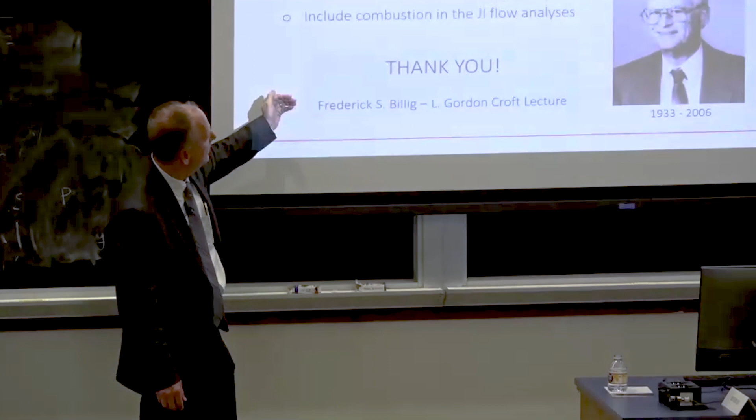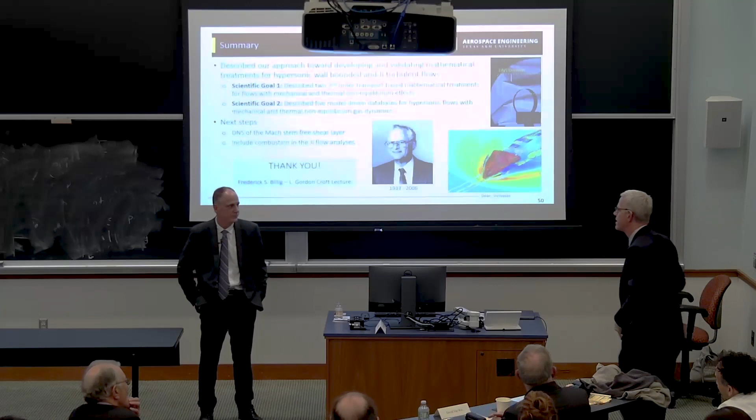Rodney: Okay, we started late, so don't worry about going over that. It's fascinating. We'll take a few questions, and then we do have reception afterwards. The only thing between us and food is questions. Questions are important. This was fascinating.

Ready? Front row. Let's see. Okay, back here. It seems like you have a pretty robust experimental library of experimental apparatus. Do you feel like you're hamstrung in any way where having more experimental data, more experimental setups, or even more flight tests would be useful? I know that flight testing is getting more and more common. I think there was a Stratolaunch a couple of weeks ago. Rocket Lab is doing some stuff as well.

That's a fantastic question, and the answer is yes and yes. I mean, flight test data is the truth. When you do an experiment in a wind tunnel, give me a second, I'll just talk about it. You do an experiment in a wind tunnel, you always have wind tunnel effects. Most wind tunnels, with the exception of quiet tunnels, have a free stream turbulence level.

In supersonic tunnels, what happens is you get turbulent boundary layers, and those structures create acoustic noise that radiates in. That acoustic noise, for example, can change transition. Not only does it change the Reynolds number or the position of transition, but it can also change the mechanism. You can turn on a different mechanism with the noise. And so flight is truth.

We were very fortunate. We got to lead the BOLT-2 flight test program, and that data set is tremendous. We were able to resolve high frequency response PCB sensors on there. And we measured the different modes as they turned on and off and watched it transition. We measured the skin friction, we measured the heat flux, we've looked at things like Reynolds analogy, we've looked at a lot of different things, we've watched the transition fronts move up on it.